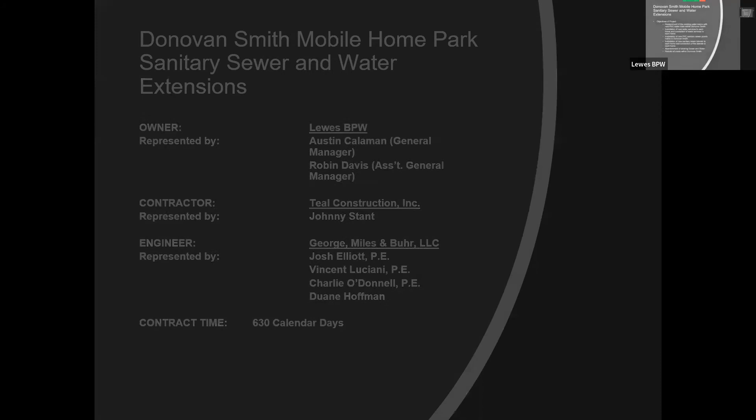All right, so the objectives of the project are, I think a lot of you know pretty well, but I'm going to go through them. Replacement of the existing water mains with new PVC water mains, installation of new services to each home, as well as connecting into each home. Installation of new PVC gravity sanitary sewer mains within the community, installation of new sanitary sewer laterals to each home, as well as the connection into your homes. Abandonment of the existing water and sewer systems, and then rebuilding all of the roads within the community.

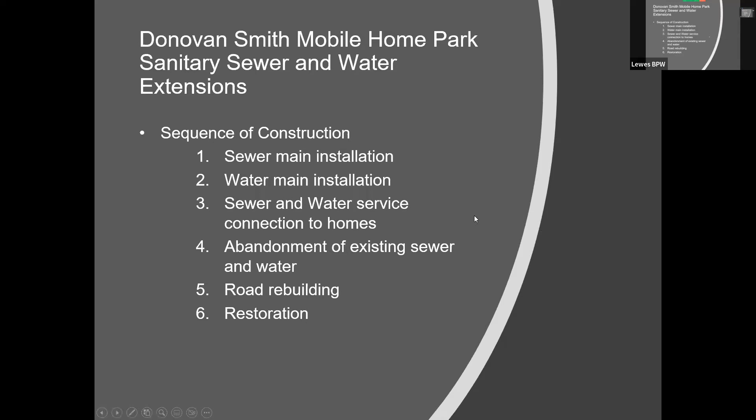All right, so there is a staging area within the community, at the back of Fairview Circle. I'm sure you all know it better than me, a big, pretty open area. And that's where the contractor is going to store their equipment. And if you have something there currently, we're going to do our best to work around what's there. At the end of the project, it'll be put back how it is now. So.

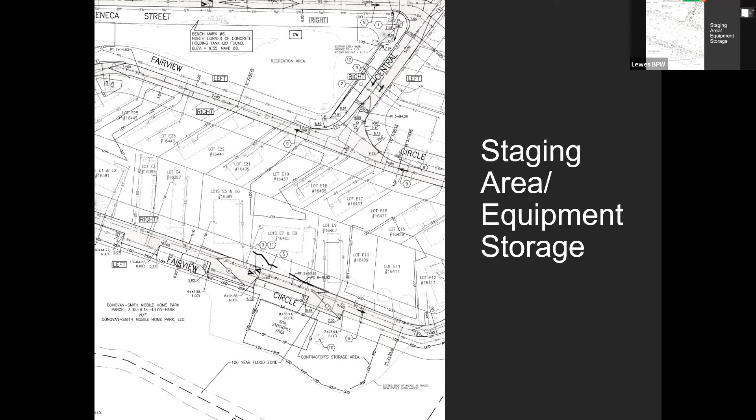All right, so a little more information about the installation of the sewer. So what is out there now? You guys are pretty familiar with what currently sits there, but there's a lot of holding tanks, small diameter sewer and clay pipe that's buried pretty shallow. All of that's prone to breaking and cracking. We're going to go in with large diameter PVC pipe that's buried at the proper depth. And all the sewer will go to the treatment plant in town now.

It'll go into the manholes that were put in as part of the Donovan's Road project that you all are very familiar with, putting up with that for the past few months. And another big point about the sewer is it's going to require dewatering, which you all saw a lot of that as well. That's the big pipe that runs along the trench with all the pipes that stick up like that and go to the pump.

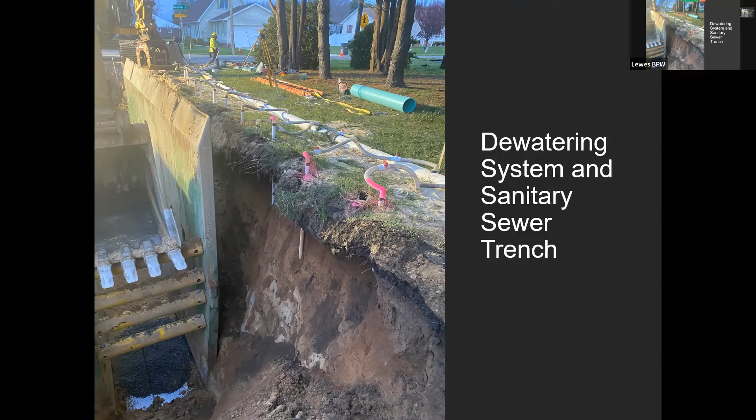And then that's the pump similar to what they'll be using. And that's kind of what it looks like when they trench the pipe across. It's a shallow trench, they put stone in it, and then you can drive right over it like it's not even there.

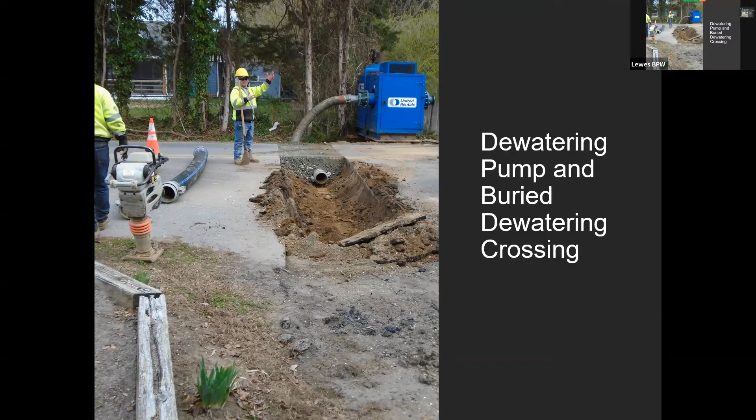And then at the end of the day, the contractor is going to restore the trench. They'll be putting crushed stone or crushed concrete in the trench and bringing it up about level to where they cut down into the road. And then they'll be maintaining the trench throughout the job. If a pothole develops, they'll come put some more stone in it and drag it flat.

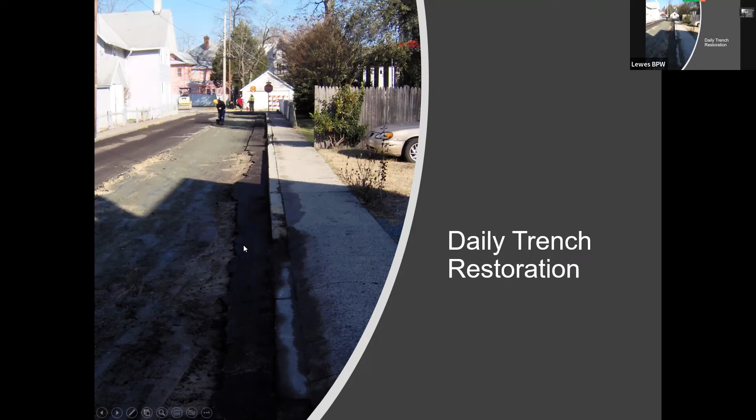So the traffic control during construction: where there's two-way roads, which there aren't a lot of inside the community, they'll have a lane closure and you'll still be able to get around that way. Out on Donovan's Road, when they install the water main, there'll be a lane closure. But the impact's not going to be as bad as it was when they put the sewer in Donovan's Road. The water main doesn't go in nearly as deep. The water main's gonna come down.

Yes. So we put the sewer in the, I'll call it the north lane. You'll know where the sewer went. Yep. The water will be in the other lane. That construction will go much quicker than the sewer went in. It's not 20 feet deep, 16 feet deep. It's very shallow. It's 4 or 5 feet deep. Yep. So Donovan's Road will be just a lane closure.

And then inside the community, on all the one-way roads, there'll be, I'm gonna call them moving closures. So they'll set up barricades or some sort of traffic control. If Fairview's closed, they'll close each end and they'll be able to let people through. So there might be cases where you've got to go the wrong way down the one-ways during construction.

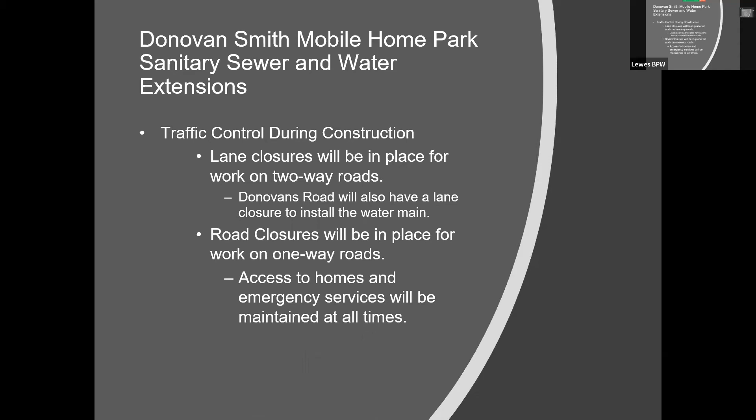All right, so that was the sewer. The trench restoration is the same for the water, traffic control, that's all the same for the water. But the water portion of the project is gonna put about 6,000 feet of new water main in the ground. And I think it's something like 10,000 feet of water services to all the homes.

And so the existing main that is fed by the two wells is gonna be abandoned in place. When I say abandoned in place, basically it'll be cut where it is currently. Caps will be put on the pipe, it'll be left in the ground. If it ever gets encountered in the future, it can just be ripped up and taken away.

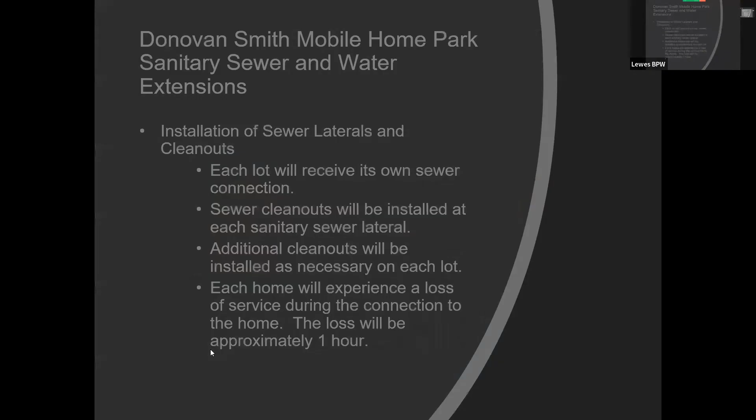Yes, Sam. I know there's a lot of tree stuff, because I know there are a lot of trees. So we tried to avoid any trees during the design, anything like that. If in the design we're going through a tree, we'll probably try to move the lateral and or service elsewhere, just because it's more work for the contractor to go through a tree than to just move 5 feet to the left and install it.

What happens in the event you put a sewer line in and the tree actually grows into it and chips the line? So because it's PVC, there'll be a lot less of an issue with that, like with root intrusion. Clay pipe, a lot of it's older, it gets cracks, the joints start to fail and leak, and the roots seek out water. With the PVC pipe, it shouldn't be an issue for a long time.

And so this is kind of what the sewer will look like after it's in. The main will be out in the road, and then everyone will have this first clean out off of the main. And then depending on the geometry of the pipe, like I was saying, you might have additional clean outs after that first clean out. And the clean outs are just for if you get a clog, you can clean out the pipe.

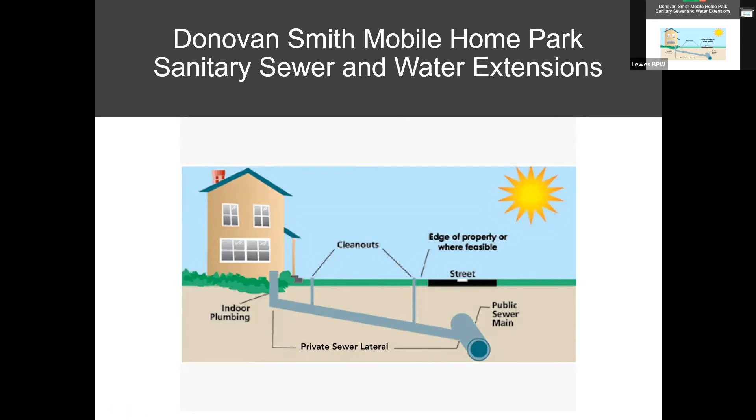All right, so the water services, once again, oh, yeah, Sam. Question about the clean out. Yeah. Is this like somebody's clean out or sewer got stopped up? Is this something that the homeowner is gonna be responsible for? Who's gonna be responsible for it?

So the clean out at the edge of the road, because the easement goes around the entire development where the sewer main is, there's gonna be a clean out that is closer to the road. At that clean out, that's where the responsibility line ends. So if it's from that clean out into the main, it's on us. From that clean out into the property would be on the property owner or the

park. So we have to call a plumber or someone to actually clean it out. And once we clean it nearest to our house, if it doesn't clean out, then it's the responsibility of the city. Yeah, that's the same throughout the entire city.

Like last summer, pipes up the road, they dug a hole out, because the end of the sewer is in my yard. So they had to cut pipes and stuff, but they just left it. But anyway, that caused a problem in the sewer line. And I had asked the park to remove some of the trees at the time. It's surrounded by trees, and that's gonna be a problem, and it's gonna be my responsibility. The sewer's not working from the road over.

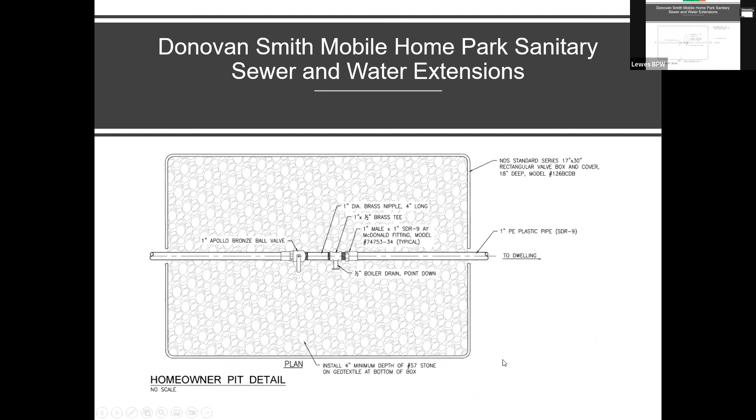So the abandonment of the septic systems, the only thing that really gets abandoned is the tank itself. The pipes all get cut and capped, just like the water mains. The lines will be empty when they're cut and capped. It's cost prohibitive on any job to rip up all of the existing sewer or water. That's pretty typical on capital project jobs. The old main is left in the ground.

And then the septic tank removal, basically what they do is break the bottom of the tank. Well, they empty it first, sorry. Then they remove the top, break the bottom of the tank. And then they fill the tank with sand, so you don't see anything left above grade. It'll just be dirt and grass where the tanks were. You break the bottom out so they don't just fill up with water. You fill them with sand, then water drains right through them like it goes through the ground.

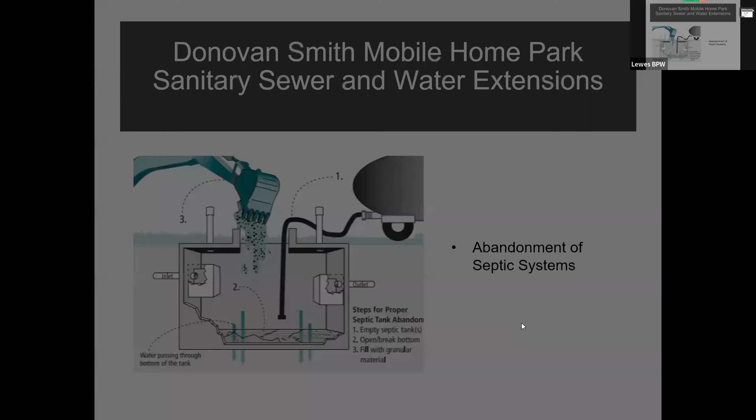All right, so after all that work is done, the roads get rebuilt. And so they're full rebuilds, not mill and overlay. Like a lot of places you see just the top gets milled off and asphalt gets placed back down. But in this case, everywhere there is currently a road, the contractor is going to cut about 12 inches down and then come back with stone and 2 different layers of asphalt. And you'll have brand new roads.

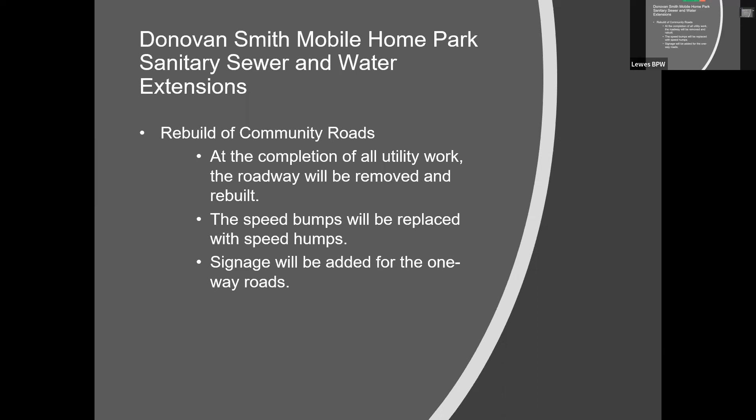All the speed bumps will be replaced with speed humps instead. So you won't lose an entire axle. And then signage will be added for the one-way roads. New traffic markings will get added. And then I think I've got the picture.

I know most of you are probably familiar with what the speed humps look like instead of the speed bumps, but they're not tables, but they're similar to them. Yeah, the tables typically are just bolted down. These will be made of asphalt. The ones where I used to live were asphalt. Yeah. They weren't the bolted down ones. They were the asphalt. Yep.

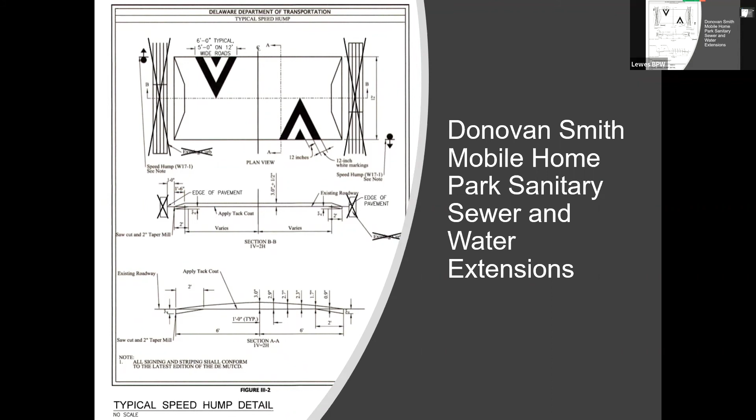All right, and so this is just a slide with Duane's contact information. I encourage you all to introduce yourselves to him this evening. And then as you see him throughout the community, taking pictures, taking videos, phone and email are there. He'll be on site every day of construction to help you guys through everything, take complaints, take questions.

I have a question, we have several abandoned houses. Some of them boarded up, are they gonna connect to those houses too? So we'll coordinate with the park owner on the actual connections of those. I presume they're owned by the park. Well, maybe. Yeah, so we'll coordinate with the park owner on them, figure out who owns them. If we're not connecting to them, we'll still put the lateral for the sewer and the service just to the lot line for the water, so that in the future they'll be able to be connected to.

And every currently vacant lot will get a lateral and a water service. So even if they can not- Yep. Will the roads be wider? No, they're gonna be put in the same as they are now. Yes, ma'am. You wanna read that one?

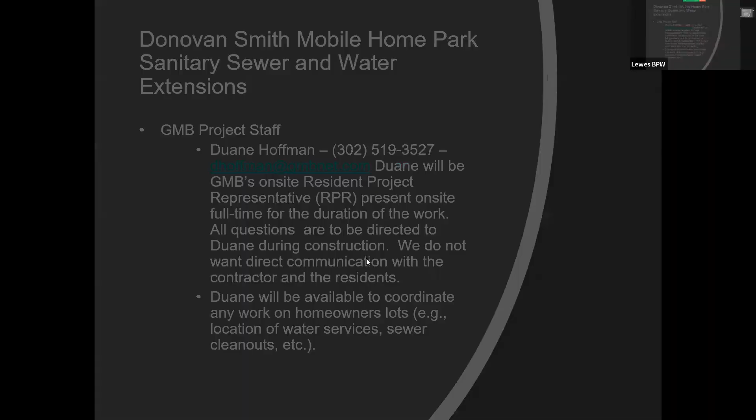We are more than happy to put them online. I don't see any issues with that. Sharon's the social media guru. So what we'll try and do is create some sort of page on the website that's Donovan Smith specific, to put minutes for meetings and recordings for meetings. Yeah, so we'll try to get that out.

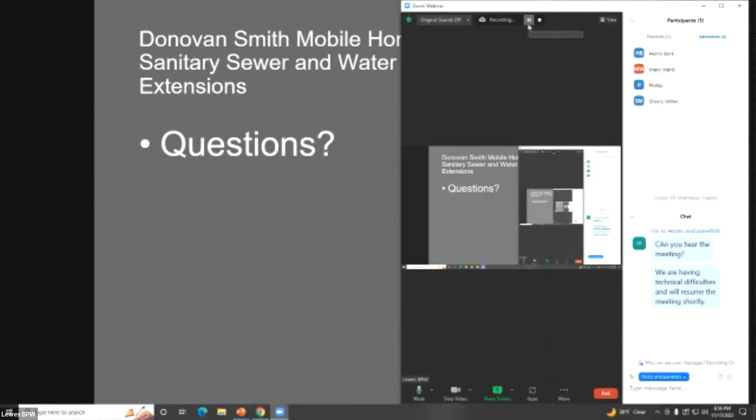Thank you everyone for coming out. We hope to make it a good project, and I can't reinforce it enough that this is your guy right here. He is going to try to help you out as much as he can. Thank you all. Thank you. Yeah, very welcome.